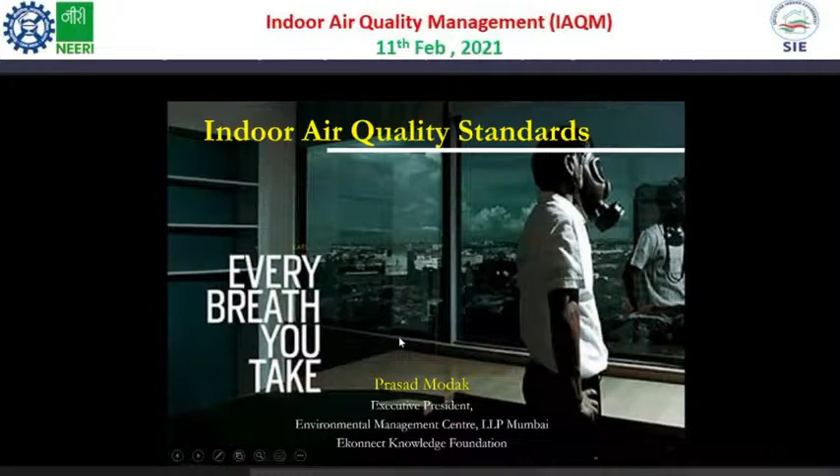Now, the dweller, if you look at it in the building or any built structures, the air quality part becomes so critical, which if not maintained, either due to sources of pollution in the indoor environment or poor air circulation and inefficient air cleaning systems, you tend to see people often complaining of eye or throat irritations, headaches, in some cases even dizziness, feeling of nausea and sickness, and those especially who are prone to asthma can even face difficulty in breathing.

There also have been results people have seen where there is irritation on the skin, and in such an environment it then becomes very difficult for working people to concentrate on their job, and also causes a lot of fatigue. And it's not just the work environment we are talking here, we're talking about also residential houses, cinema halls, and you find that in all these enclosed spaces, the indoor air quality is playing a very important role. And when such symptoms were seen and people started diagnosing why, it was clear that indoor air quality has been pretty much responsible.

And the sources are sometimes so difficult to imagine, like releases of volatile organic compounds, for example, from the materials which are used. That may include wall paints, floor carpets, and this diffuse leakage of these pollutants, apart from cooking or using a fuel, was also then identified as an important source of indoor air pollution. And when these kinds of problems were getting persistently observed in buildings, then this term came up, what we call sick building syndrome, or SBS.

And this syndrome was then observed in many places, calling for attention that something has to be done so that the indoor air quality over a period of time is corrected, is improved, and then such symptoms people face in the workspace or the living areas are addressed. And that very concern brought out the importance of the subject of indoor air quality.

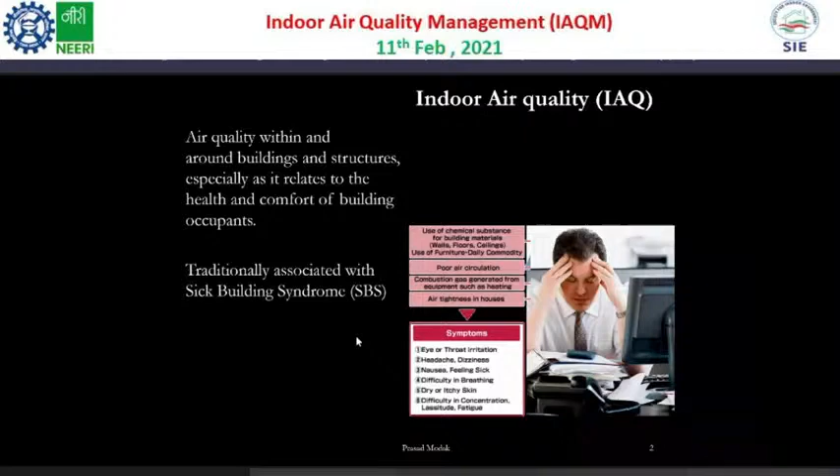And the response typically you would see in any environmental governance is to first set some goals or acceptable values, which we call regulatory standards, and then these standards could have tiers. Some of them could be primary level standards, and some could be secondary. Some could be even structured as desirable levels of indoor air quality. They may not be strictly regulated, but can serve also as guidance.

And since we are talking about the air quality indoors, it is important that these standards are also supported by building codes, because the building design, the airflow, becomes a very important parameter which can influence the indoor air quality. So unless these two, the standard setting process and the building codes, resonate, you may not get a good solution to address this problem. So something very important all of us have to realize is that ambient air quality standards are not enough when it comes to indoor air quality. As I was saying earlier, we have to look into the building codes.

Now, this needs a transdisciplinary approach, because you have to put on top of all this the health specialists who are going to investigate the causes of these symptoms, and also regularly monitor the dosage that populations sitting in the built environment receive, and what the health implications are. The subject then becomes challenging, because not only are we going to look at building codes, we have, after I finish, on the panel Richie Mittal, the president of ISHRAE.

The whole idea of how you use air conditioning, because many built structures today have mechanized ventilation, so they have to be brought in. You've got to bring in people who are in the paint industry. We've got to talk to people who are in the furniture industry, because you do get releases of VOCs from the sealants which we use, the waxes which are used in furniture making, textiles, curtains.

They also release or leak out VOCs, and that depends again on what kind of finishing processes are being used and what kind of chemicals are used on coating of these fabrics. So the subject then becomes very complex, that we have to bring in all these stakeholders, and therefore I would say standard setting for indoor air quality is much trickier than setting standards for the outdoor air quality.

Since we are talking in this address, I want to talk also about some interesting lateral issues, that when we talk about outdoor air quality, even there you have an issue, because we generally talk about ambient air quality. We don't discuss pedestrian exposure air quality. We haven't got a standard for pedestrian exposure, which is a part of the outdoor air quality, but something very important that needs to be looked at and should be considered, especially when we talk about traffic signal planning. Now, that's where we get idling emissions.

So the response, if you look at it from the various governments, realizing the importance of indoor air quality, began as early as in the 80s, and 87 was the year when Canada came up with IAQ, or indoor air quality guidelines. And they reflected these guidelines in the building codes, what I was talking about. So that's very important to note. It's an early beginning. We are talking here more than 30 years ago such a development took place. And then you find Finland came up with the indoor air quality standard, again guided by the building code.

Singapore was also at the same time, in 1995, they came up with their code of practice, which is applicable for new buildings as well as the existing buildings. Remember that in all these responses, the built structures, their design, the codes are intimately integrated to the expectations on the indoor air quality. 96 was the year when you see Germany came up with guidelines, but then these guidelines were applicable not just for residences, offices, and schools.

And Poland took a step where they started specifying maximum allowed concentration based guidelines. So they wanted to be surely safe by limiting the maximum allowed concentrations of pollutants indoors. Japan is a case where World Health Organization's guidelines or standards were used as a foundation, and that led to the Japanese indoor air quality standards.

And you find everywhere, I'm not going to take you through every year's milestone, Norway, Hong Kong, France, United Kingdom, you will find that these guidelines got evolved more so not for enforcing agencies, like in our case, pollution control. An important element that we have to realize is what was that genesis, and how you will find everywhere a combination of regulatory standards supported by the building codes was the approach.

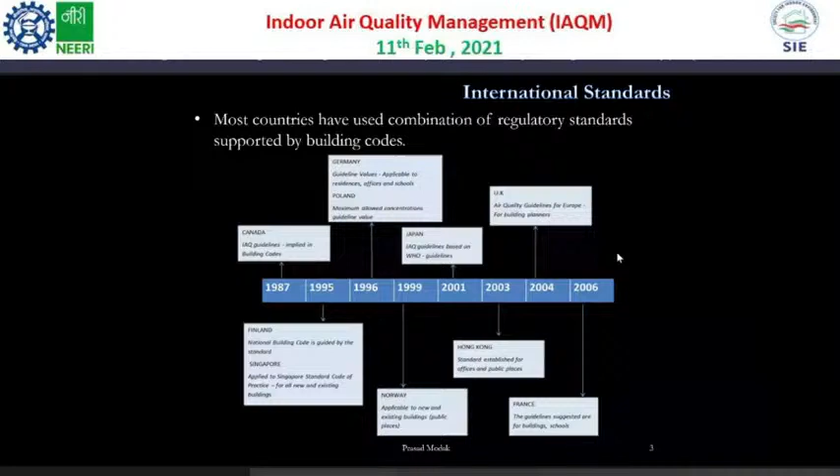So China's journey began early. We are talking about these 3 stages, and each stage began with identifying the harmful substances and what kind of limits could be set to influence the sources. Remember that when we bring in such standards, we are influencing the industry.

Let's say a paint manufacturer: if people are made more and more aware that paints with high VOC content are harmful to the health of people, that pressure, with consumers or citizens demanding, questioning, or not buying those surface finishes like paints with high VOC, is a market risk to the producer. And therefore, these producers will have to modify their manufacturing processes so that they limit the leakage of volatile organic compounds.

So any standard-setting process in a complex indoor environment is giving signals not just to the paint manufacturers but even the furniture makers. All these are impacted when we come up with indoor air quality standards. We call this the cascading effect.

If there is no preparedness, and no drive to raise awareness in the community, such realization is not going to happen. So I may have a standard, but if I don't influence the sources of emissions in the indoor environment, I will always be non-compliant with this standard, right?

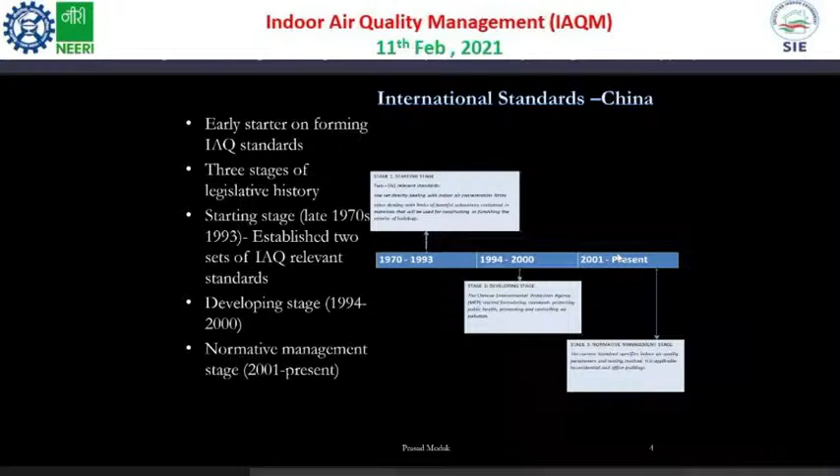That is what we call maturity processes taking place in countries, going through stages. The developing stage is where we learn how effective these standards are. But it takes a while, 20 or 30 years, to reach a normative management stage, where you understand the phenomena better. In some sense, the numbers each country came up with could give us an idea of what levels we should be looking at as a goal.

If you look at these numbers and set them as standards, the question then comes: are they achievable? Remember, when you set a standard, there is a whole cycle—you have to develop a sampling and monitoring protocol. That's important for an environment like indoors, because the atmospheric turbulence indoors is not easy to understand. The whole process behind setting the standard is critical, because deciding whether to set it at 50 micrograms, 20 micrograms, or 100 micrograms becomes a very important decision about whether these standards are really achievable.

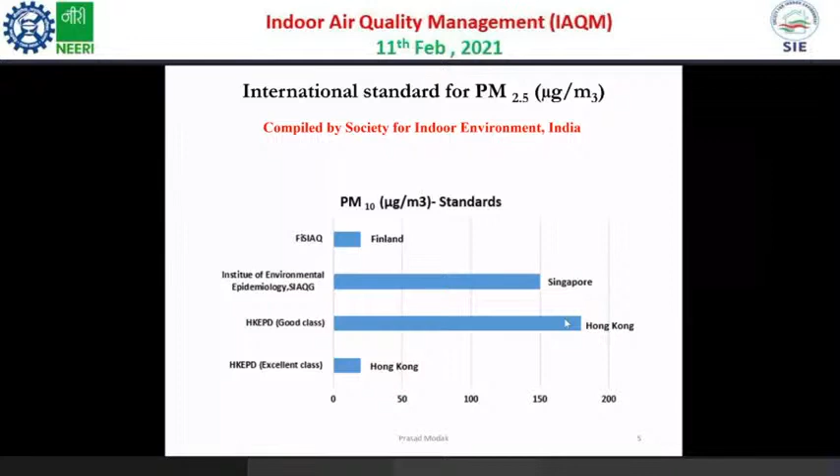Are you able to see this slide now? Not yet, sir. Is it working? You can see? No, sir, we cannot see the slide. Now, yes, slide number 5. All right, so this is slide 4, which I think you could see. Yeah, we could follow onwards, 4 you and 5. Right, so slide number 5, in fact, is what I was talking about. This is PM 2.5 standards in different countries, just to make the point that it's really varying by country to country, and even within a country.

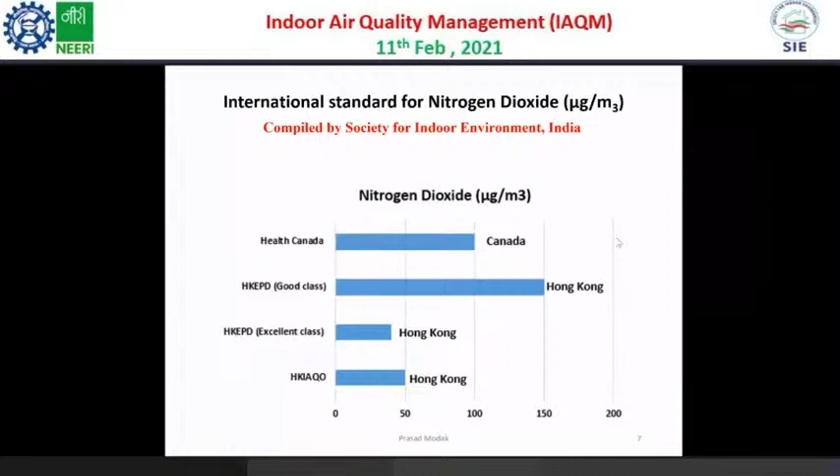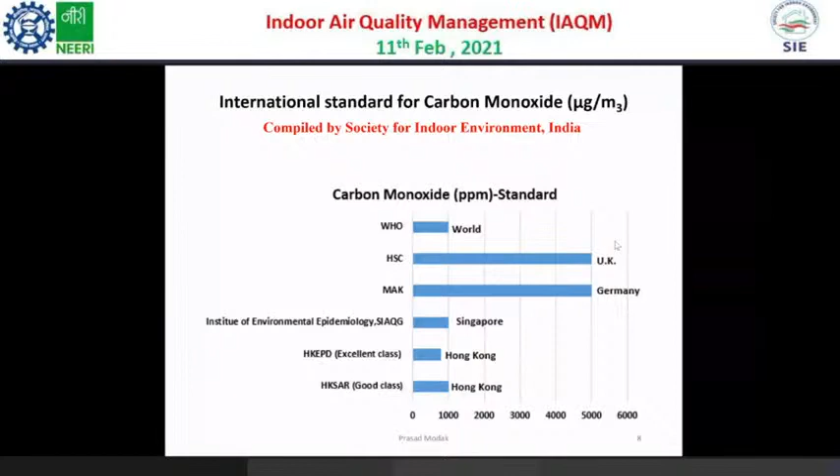Moving on to slide 8, here is a distribution of standards for carbon monoxide. You will find a similar situation of a fair amount of variation between countries in setting up the standards, in micrograms per cubic meter, for carbon monoxide.

Now, if you look at the situation in our country, we responded to the concerns on air pollution way back in 1980. We had the Air Prevention and Control of Pollution Act of 1981, and then the first series of standards came up in 1988. They were all for ambient air quality. They got updated majorly in 2009, and the whole effort was to get aligned to the international ambient air quality standards. But today, we still don't have an indoor air quality standard.

So while we responded pretty all right when it comes to ambient air quality, the kind of progression I was showing you, as early as the 70s, means 40, 50 years ago, the whole journey of starting and developing and getting into normative decisions, nothing of that sort has taken place in our country, which is indeed a pity.

So much so that if you look at the National Clean Air Programme, which was announced last year, and which the Ministry of Environment and Forest is implementing through the technical help of the Central Pollution Control Board, they have been making air quality action plans. You don't see any trace of discussions there happening on indoor air quality, and that's something very, very discouraging, that we haven't really mainstreamed or even attended to the need to look at indoor air quality.

If you look at the whole objective of NCAP, it is to actually improve the health or protect the health of people. And like you said in the opening remarks, health is better understood when you look at both indoor and outdoor, but I would say more indoors. And if that is not in the tracking system of the program, then how do we justify the investments we are making under NCAP, that they are actually going to help in protecting the health of people?

That's why, as I said in my opening remarks, I'm very happy that NEERI and SIE have come together to offer such a program.

Certainly, we require a strategic approach. You can't expect a pollution control board officer, even if you had set up an indoor air quality standard, to walk into a cinema hall or a large commercial complex with a handheld air quality monitor and check compliance with the standard. So that's something not going to be practical.

When such situations arise, where you can't really do conventional enforcement, you might like to do surveys, quick inspections through research organizations, long-term studies, but you definitely need a strategic approach to reach the objective of the standards, if we have set them.

I don't know whether Professor Mukesh Khare is here today, but there's a very interesting project, for 3 or 4 years I don't remember exactly, launched with a number of universities in Europe looking at materials and the leakages of VOCs. And this takes us to interior design materials.

I see Professor Roshni is also here today. I'm sure about some of these, but also to the areas where we talk about building materials, interior designs, etc. Like the LEED 4 standard, which we have now, is specifically on interior design. Not that every built structure has to be LEED 4 certified, but the elements of LEED 4 could be utilized and woven into our building codes.

The same thing I would say for codes coming from ISHRAE and so on. So indoor air quality gets addressed now through three important perspectives: codes, guidelines and standards; engineering control measures; and source modifications. When we follow these three together, only then may we be optimistic that we will achieve the targets.

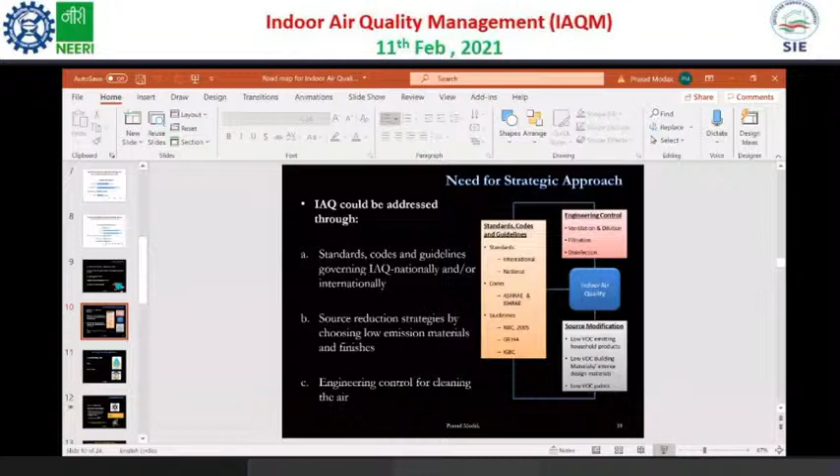I must stay on this slide a bit because this is important—what I was speaking about, that you've got to have this three-pronged strategy of codes, controls, and addressing the emission source itself. To achieve all three honestly requires a huge ripple factor in terms of professionals getting trained, material manufacturers, and air pollution control technology specialists who can exercise the engineering control. So dealing with indoor air quality and its management is not easy; it really requires good synergy between all three.

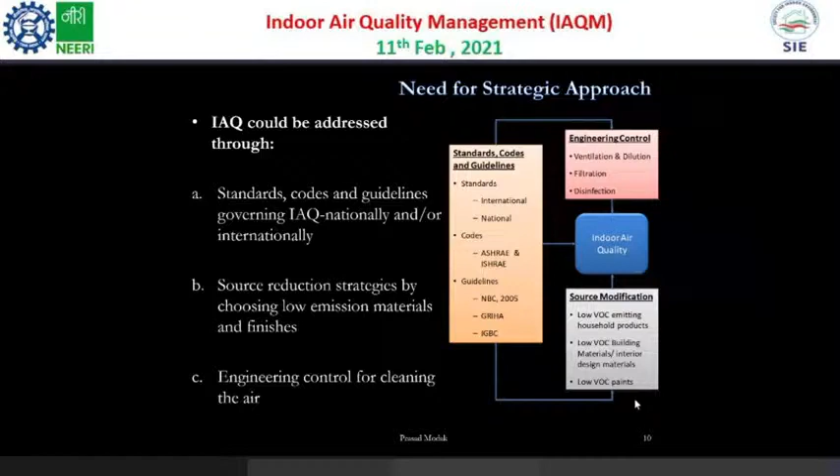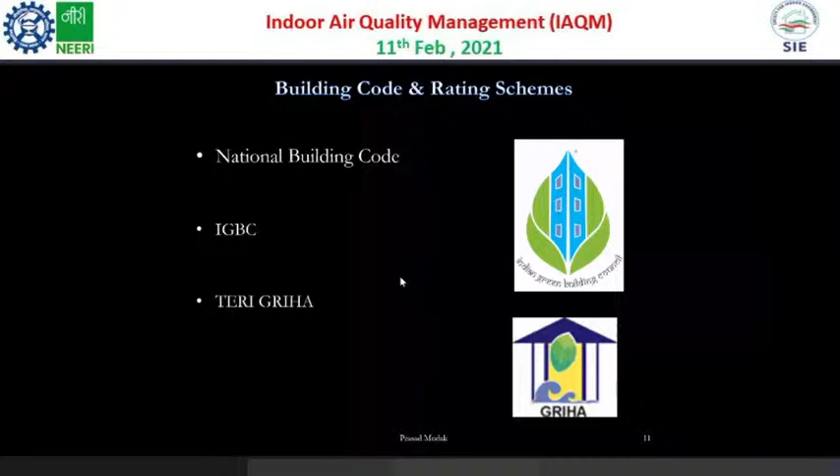Building codes is one example, rating schemes. I'm going to go a little quickly. You have organizations like the Indian Society for Heating, Refrigerating, and Air Conditioning Engineers, ISHRAE, and the International ASHRAE. LEED, I was already talking about LEED 4 particularly, and all that together makes sense to influence indoor air quality.

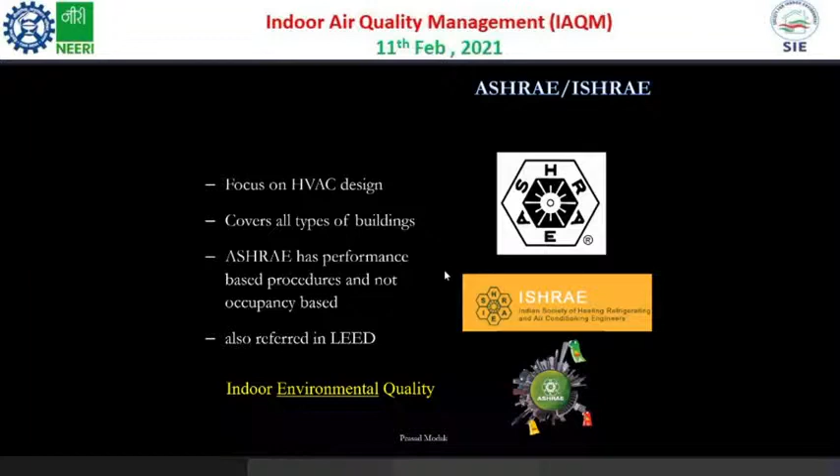Just to take you a little bit ahead and stop—the understanding grew to focus on safety and comfort, even looking at thermal stresses that people living in the built environment were facing, so air quality was expanded to cover all such different variables. Then the subject became indoor environmental quality, or IEQ, and other features like thermal stress started getting addressed. It became a broader definition, where indoor air quality was one component alongside thermal comfort, lighting and its quality, acoustics, even ergonomics, furniture, space layout—all that got into this expanded definition of IEQ, to which IAQ contributes.

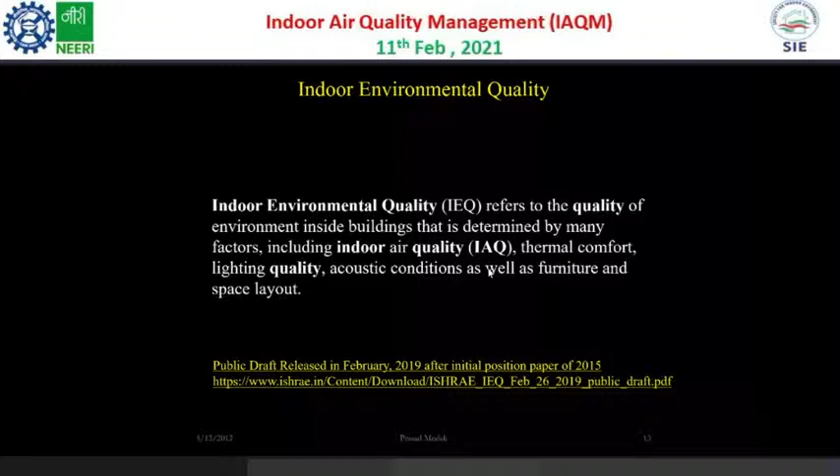Priyanka, I thought I will stop here because I have too many slides and don't want to drag on further, since some of these topics I'm just highlighting will be followed up by each of our panelists. I see Professor Arun Sharma there—he will take the health perspective in detail, so I don't want to go through each of these slides. I am going to stop with this last slide.

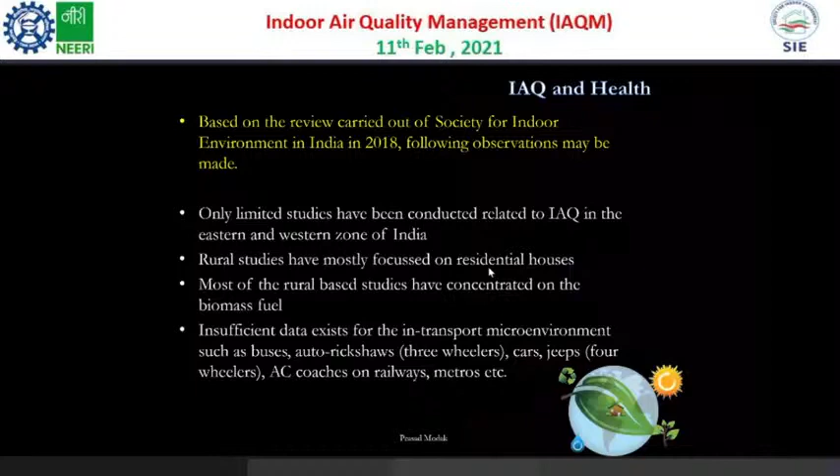For maybe more than 10 years, I have been lobbying with the government with no response, no action. That's something which is always worrying me, and all of you here, very senior people in this subject—I don't know, maybe just like the farmers, we'll have to sit one day outside the MOEF. I'll stop at this point.